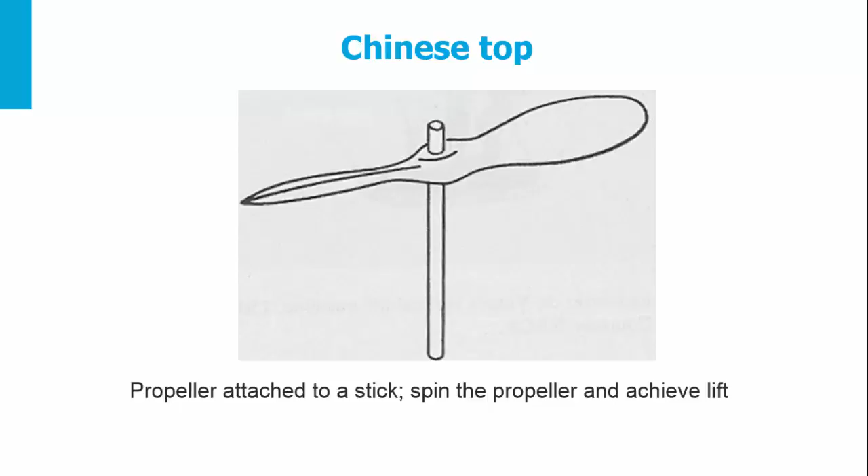Who should get the credit for the first helicopter flight? The first example is Breguet's multirotor gyroplane, which claimed in 1907 that he was flying the first helicopter. Breguet developed a multirotor helicopter and placed at each of the four corners a man for stability of the helicopter.

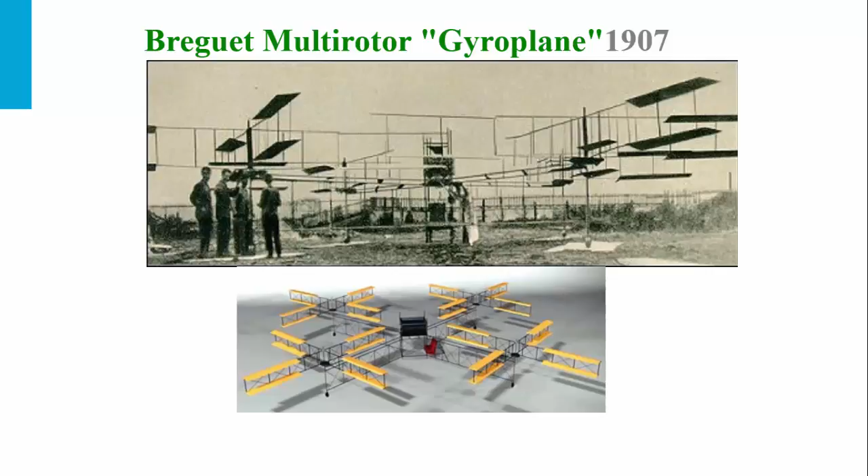Later in the same year, Paul Cornu was flying a tandem helicopter. Engineers later doubted that his machine had enough power to fly. However, Cornu said that in front of 60 witnesses he had a model that he was flying.

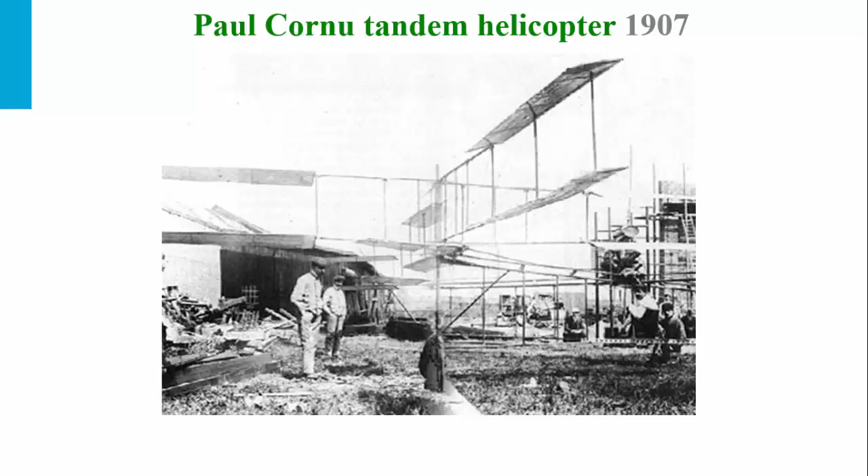The Wright brothers were also making several models but gave up developing the helicopter further in favor of the kite and the glider. They said that the helicopter does with great labor only what the balloon does without labor.

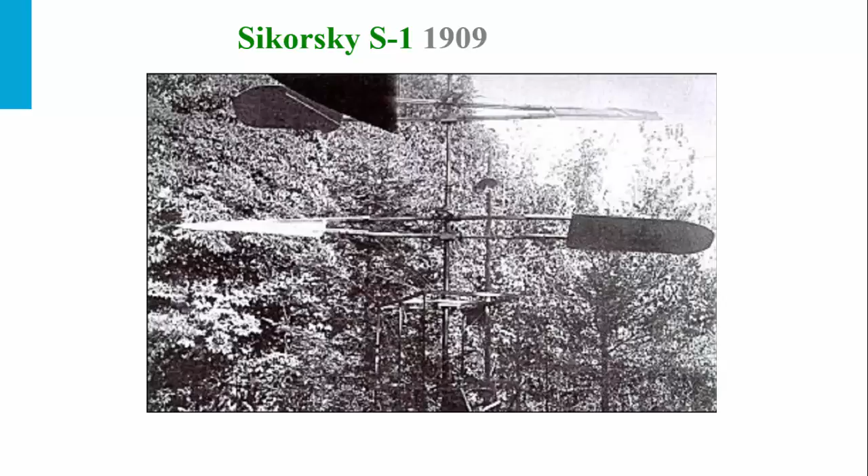The first successful flight of a helicopter was actually from the father of the helicopter, Sikorsky. Sikorsky tried to fly a rotary wing aircraft in 1909, the Sikorsky S-1 coaxial. He tested his second machine and showed that it could achieve lift almost equal to its weight, but no more.

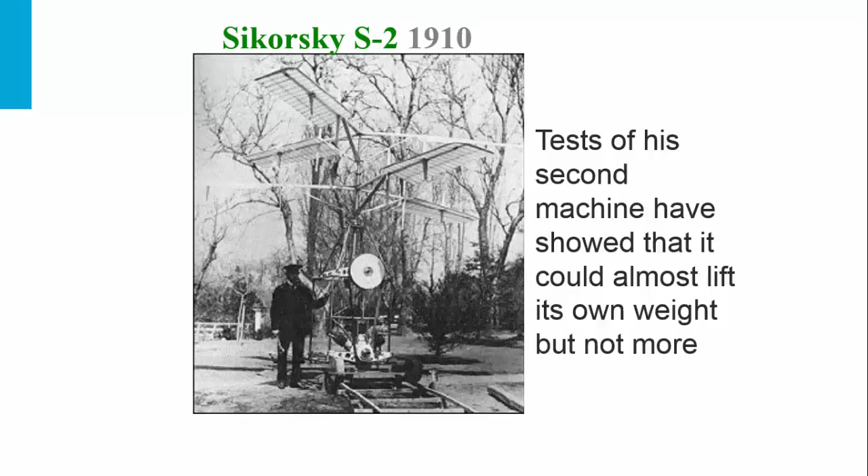The honor of the first documented helicopter flight goes to Jens Ellehammer in Denmark. Ellehammer demonstrated his helicopter in 1913 in Copenhagen in front of His Royal Highness Prince Axel. The Prince issued an official statement saying that indeed this strange-looking aircraft was rising by its own power.

In 1908, the era of the gyroplane started. The gyroplane is an aircraft supported in flight by unpowered horizontal rotor wings, achieving forward propulsion by a conventional propeller. Here you see the well-known Breguet gyroplane from 1908.

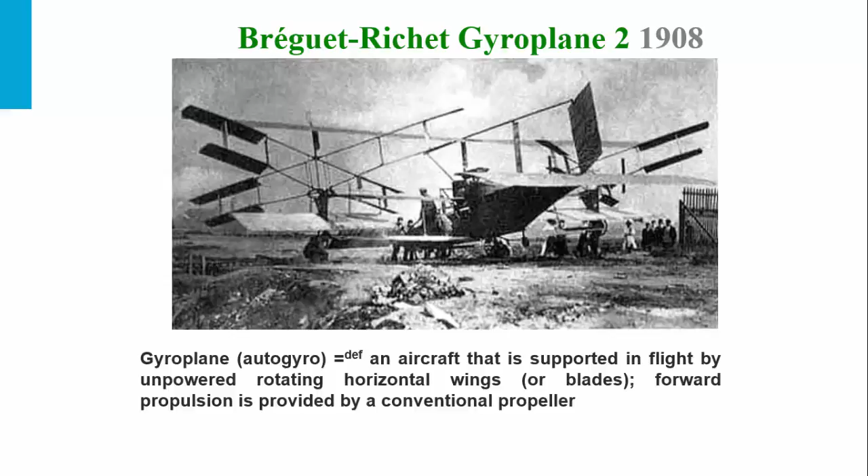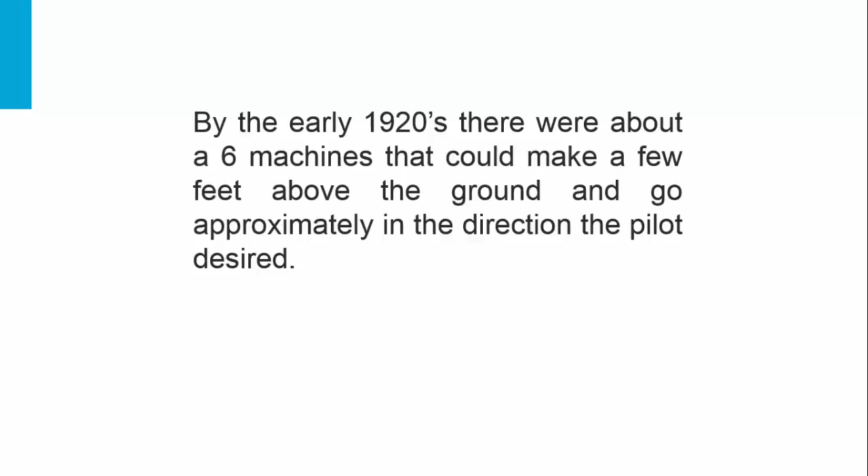By the early 1920s, there were about six machines that could rise a few feet above the ground and go approximately in the direction the pilot desired.

The first lucky breakthrough came from Cierva. Cierva developed the autogyro, discovering the principle of autorotation by observing windmills.

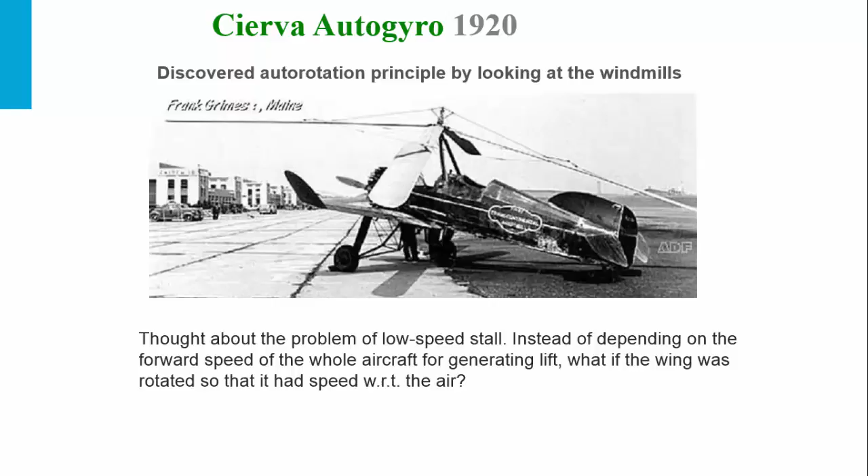He had an aircraft accident in a low-speed stall. He then thought that instead of depending on the forward speed of the whole aircraft to generate lift, what if the wing was rotated so that it had speed with respect to the air? And so the autogyro was born. Here you see Cierva in front of his first autogyro.

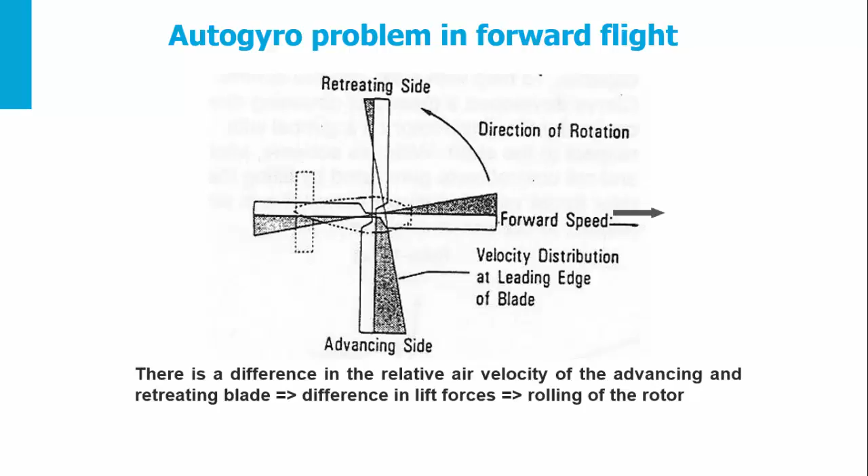The autogyro had a problem in forward flight. As the aircraft flies forward, one blade is advancing and one blade is retreating, so there is a difference in the relative air velocity attacking the advancing blade versus the retreating blade. This creates a difference in lifting forces, causing the helicopter to roll.

Cierva was trying to solve this problem of the autogyro, and he found that his model-scale autogyros were flying, but the full-scale autogyros were not. He understood that the difference between the model and full-scale autogyro was that in the model the rotor blades were made from flexible spars, while in the full-scale version the blades were rigidly attached by wires.

In this way, Cierva developed the flapping hinge. He understood that installing a flapping hinge would allow the blade to flap up and down, eliminating the asymmetry problem in forward flight.

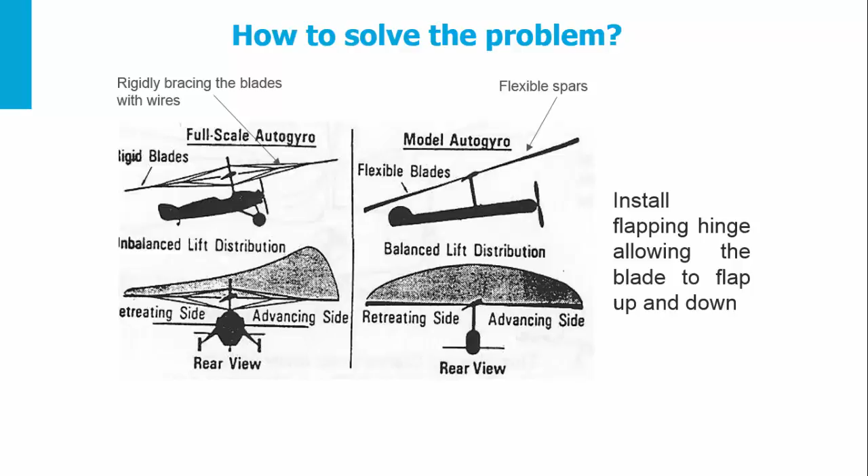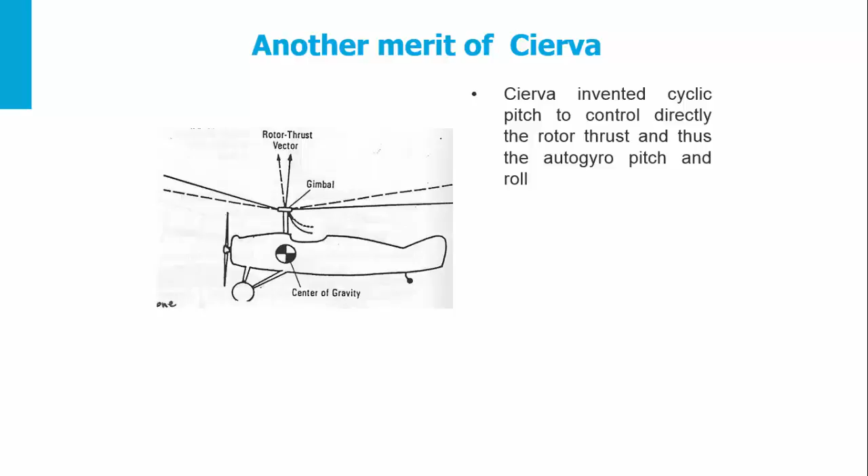Another merit of Cierva is that he invented cyclic pitch control on the helicopter, controlling the autogyro's pitch and roll. In the early autogyro, flapping of the rotor caused a nose-up pitch moment, balanced by an airplane elevator.

The pilot had ailerons and rudder for roll and yaw. However, these were not effective at low speeds.

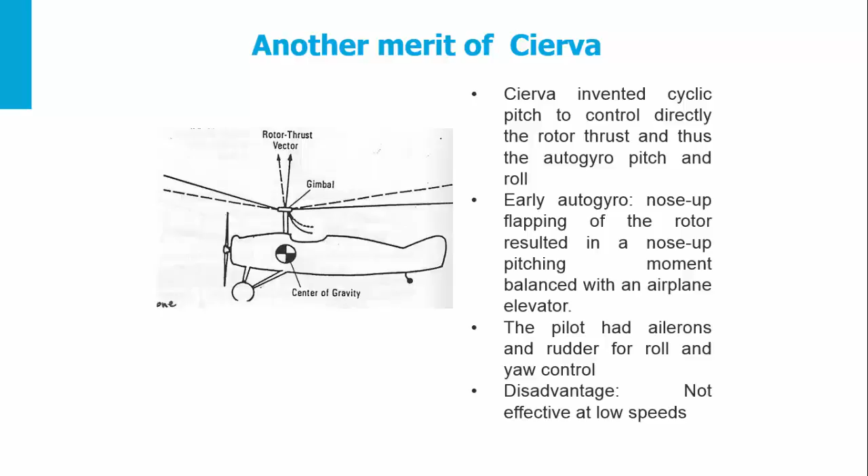The 1930s is known as the era of the autogyro. Here are some famous autogyros, such as the Harold Pitcairn. Before World War II, it was easy to fly and simpler for a fixed-wing pilot to transition to. It could do almost everything a helicopter could do, except of course hovering.

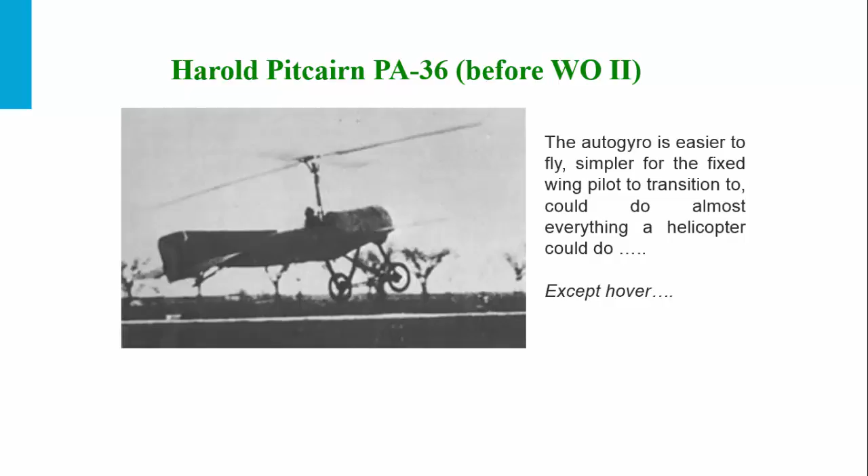The Focke Drache Autogyro went into production of 400 autogyros per month in World War II. Only 39 had been built before the Russians overran his underground factory.

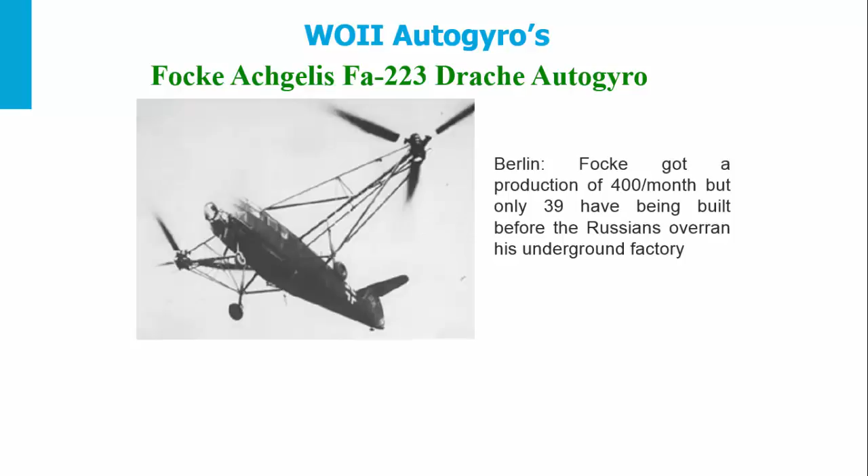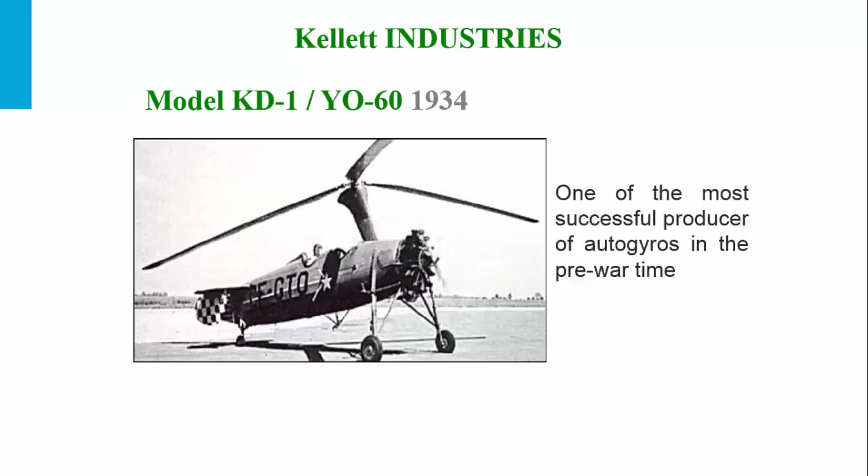By 1928, helicopters were still struggling to stay aloft for more than 10 minutes. The Cierva Autogyro was flying from London to Paris at more than 100 knots.

Hovering was what the military wanted and they were prepared to pay for. The first successful helicopter was the Sikorsky R-5.

During World War II, military helicopters were developed and production lines were established in Germany and the US. Sikorsky started in 1943 to deliver more than 400 helicopters to the Allied forces. Mass production stopped at the end of the war.

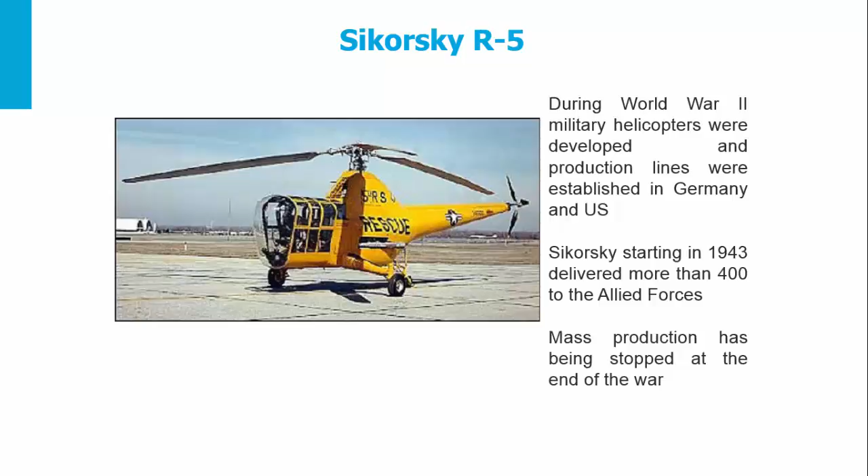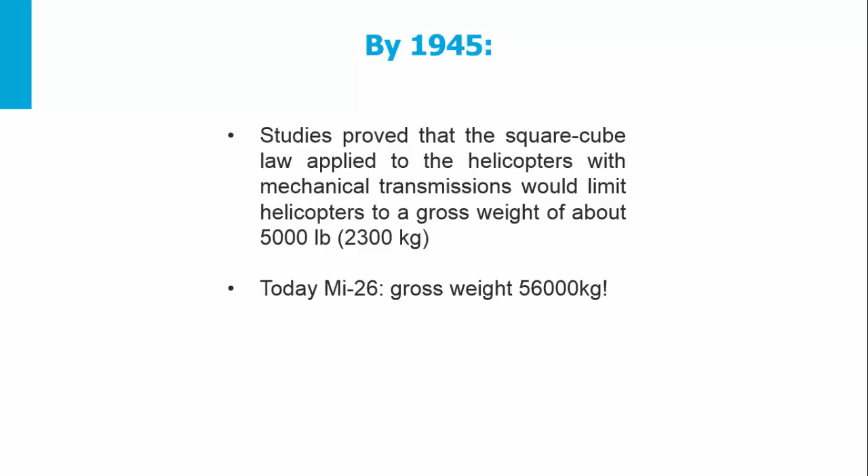By 1945, the square-cube law applied to helicopters with mechanical transmission proved that a helicopter with a gross weight of about 2,300 kilograms was the maximum. However, today we are flying the Mi-26, which has a gross weight of 56,000 kilos.

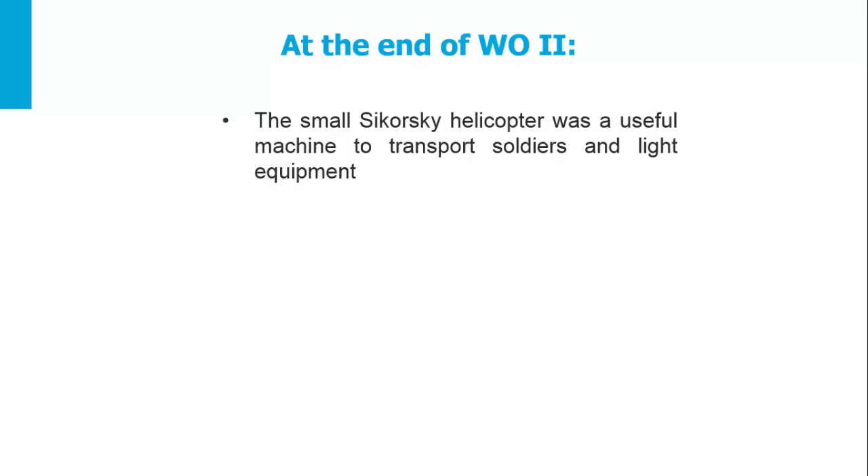How was this possible? At the end of World War II, the small Sikorsky helicopter was a successful machine to transport soldiers, but the maximum the army could get to transport was a jeep, because of the weight necessary for transmission. So transmission needed to be eliminated.

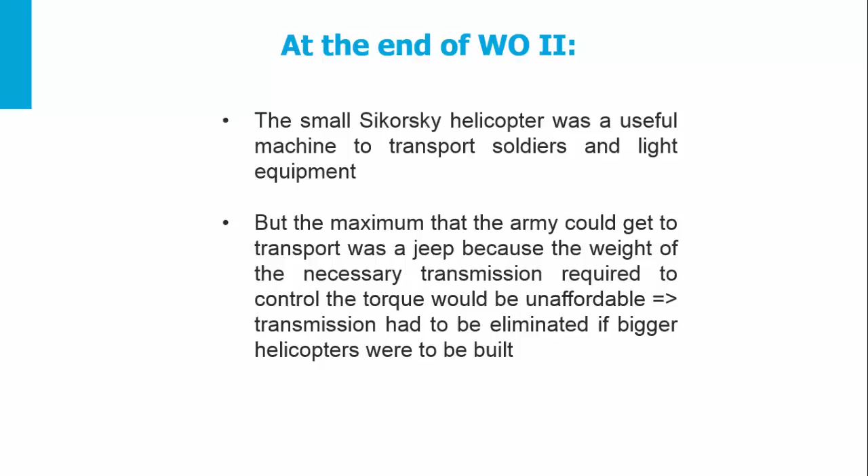The solution came in the form of the ramjet helicopter. The McDonnell Little Henry, developed in 1947, applied jet propulsion of the helicopter at the tip of the blades. Imagining that the rotor blades are traveling in the high subsonic speed range, jet engines are very efficient there. Using these engines, one can eliminate the heavy and complex transmission and get rid of the tail rotor.

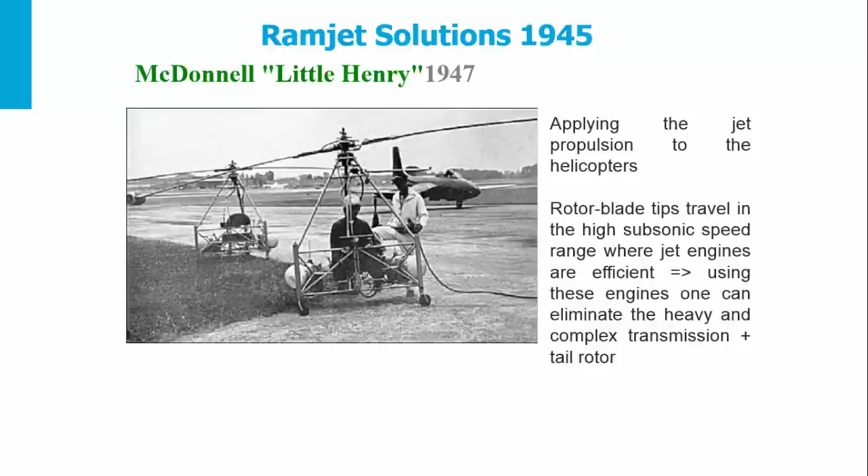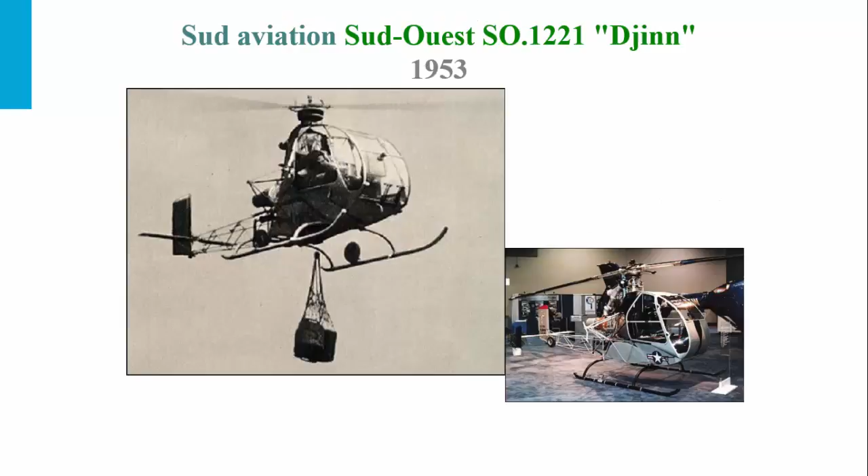The Colibri went into production in Europe in 1956. At Sud Aviation, the Djinn went also into production in 1953.

The disadvantages of the tip jet helicopters are that they have very poor fuel efficiency and are very noisy. The advantage is that they do not need a tail rotor and they do not need transmission.

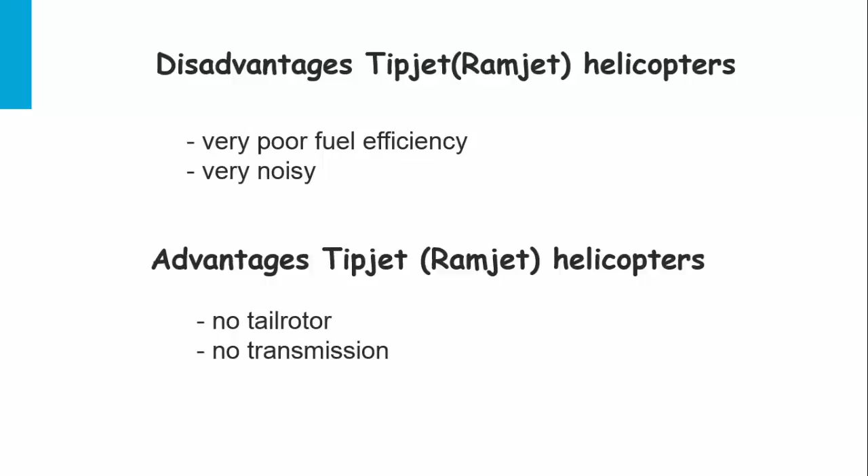The Flying Crane was a helicopter prototype built in 1952, and it had a payload of 9,000 kilos and a range of 50 miles.

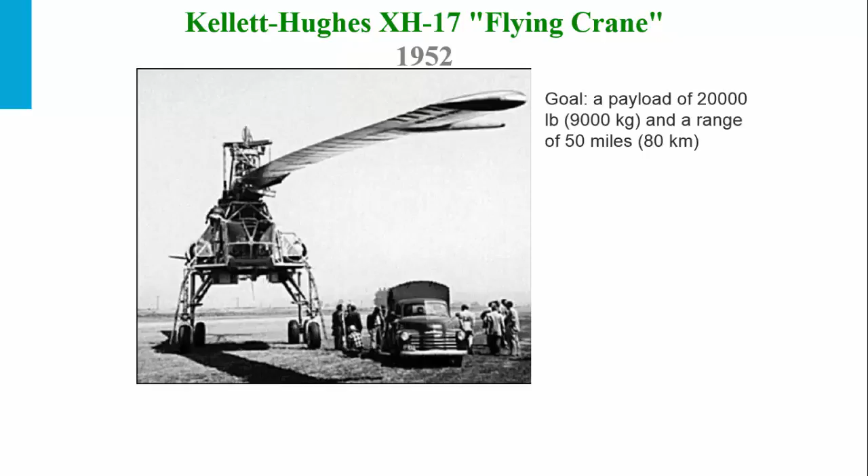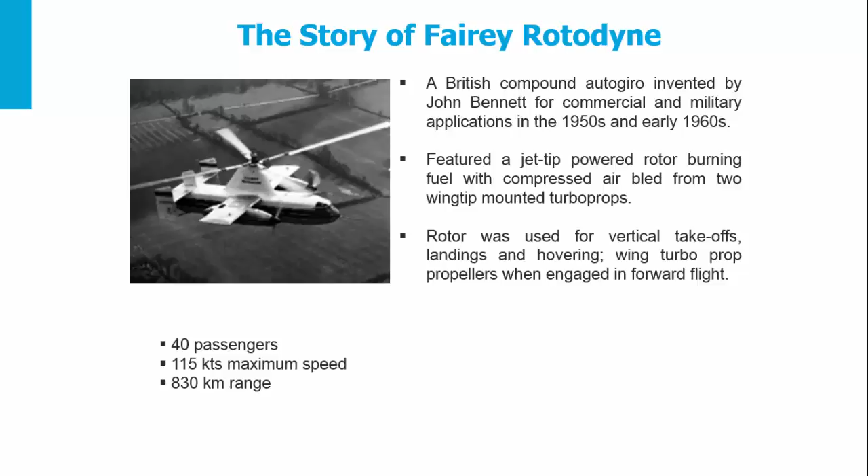In Europe, there was the Fairey Rotodyne, a compound autogyro invented by John Bennett for commercial and military applications. It had a jet-tip powered rotor, burning fuel with compressed air bled from two wingtip-mounted turboprops. The rotor was used for vertical takeoff and landing, while wings and propellers were used in forward flight.

The Rotodyne was cancelled because of politics and the lack of commercial orders. By the 1950s, developments in tip jet helicopters were not really progressing.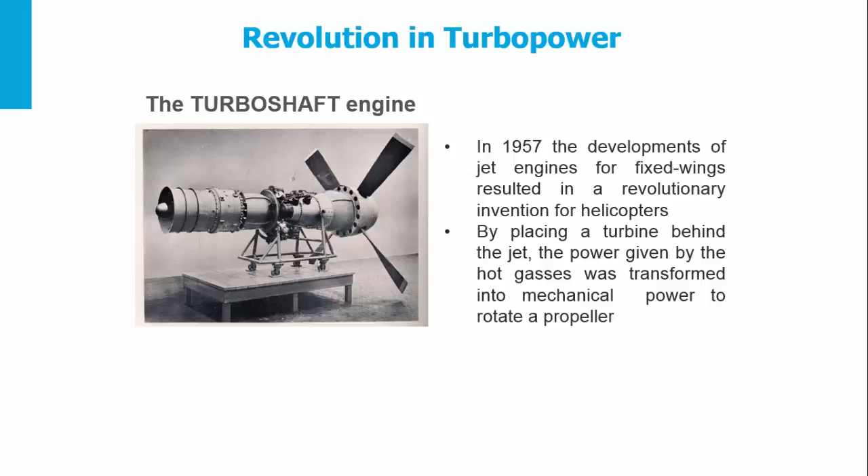The revolution came with the turboshaft engine. In 1957, developments of jet engines for fixed wing aircraft resulted in the development of the turboshaft engine. It was realized that by placing a turbine behind the jet, the power given by the hot gases could be transformed into mechanical power to rotate a propeller.

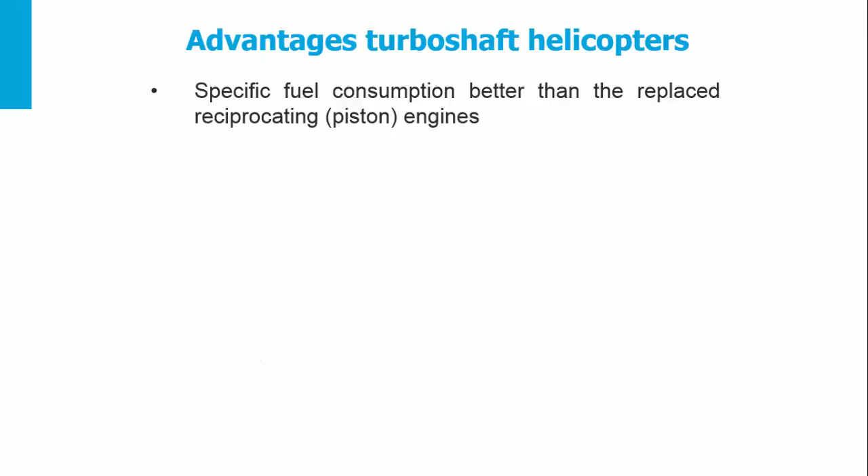The advantages of turboshaft helicopters are: they have specific fuel consumption better than the piston engines they replaced, and they have reduced weight with respect to piston engines, about one third of it.

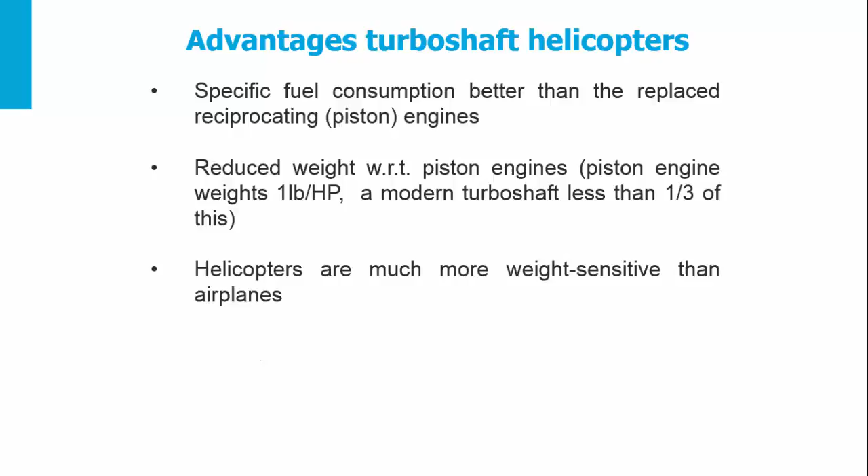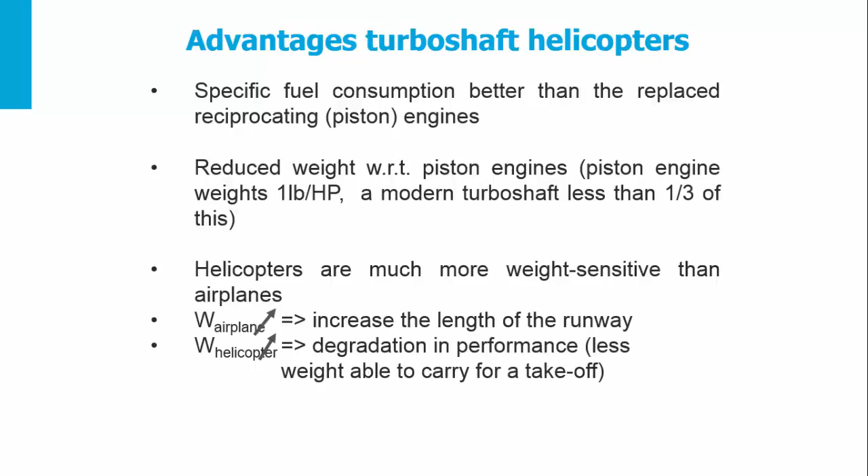Helicopters, you have to understand, are much more weight sensitive than airplanes. If the aircraft weight is increased, one can increase the length of the runway. If the helicopter weight is increased, it results in degradation of its performance, with less weight able to be carried for a takeoff.

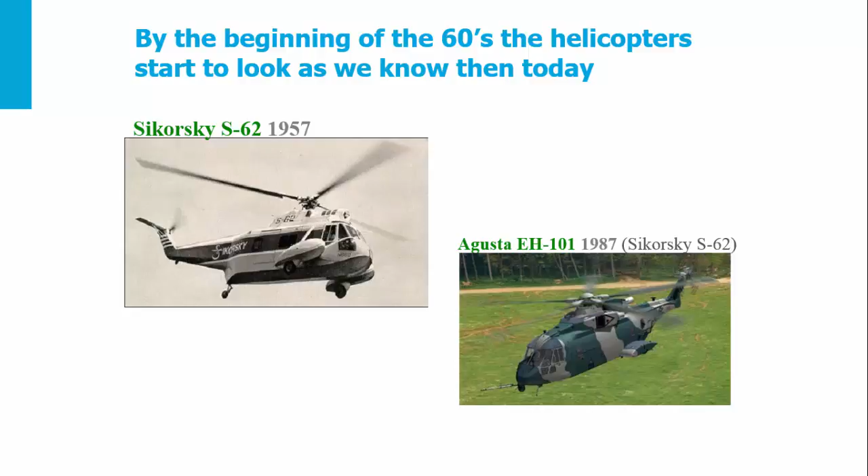By the beginning of the 1960s, the helicopter started to look as we know it today. Between the Sikorsky S-62 and the Agusta EH-101, there is an incredible similarity, they look incredibly similar. What happened in the years after?

This is the end of this part of lecture 1.